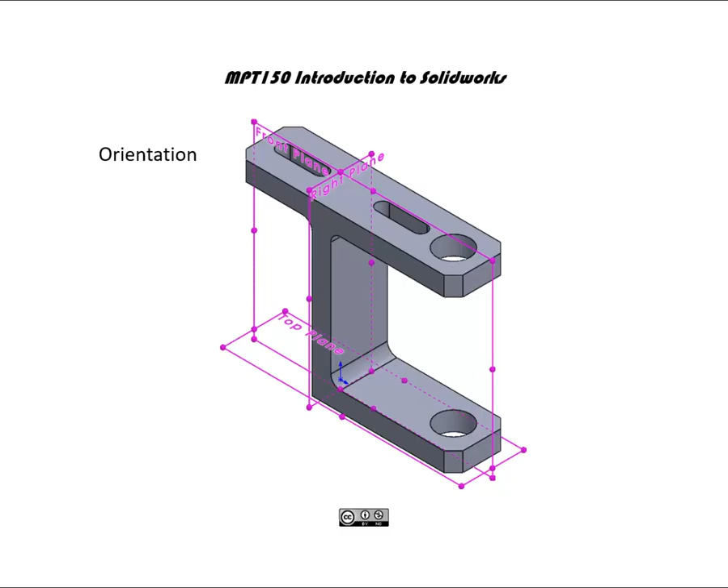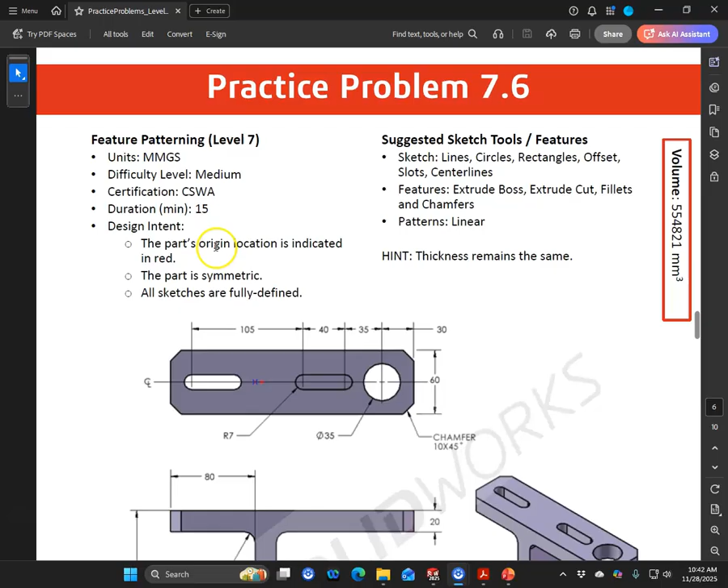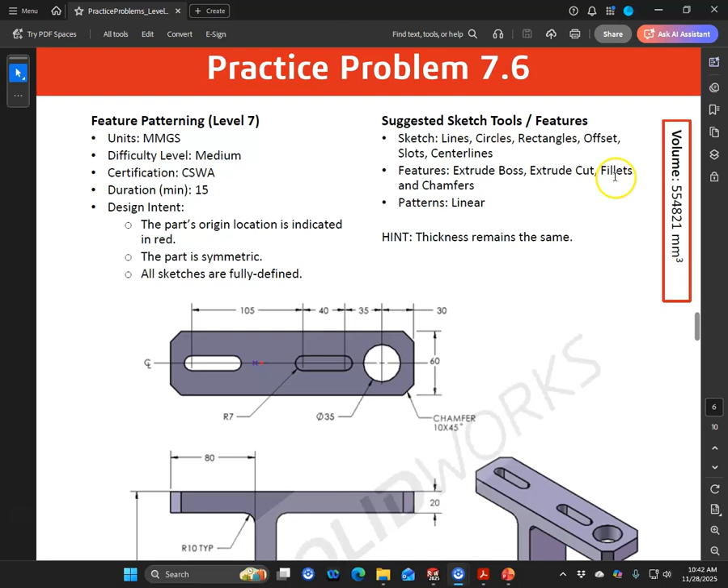Okay, practice problem 7.6, millimeters, grams, and seconds. Origin is located as indicated, bottom left, kind of center. We have lines, circles, rectangles, offsets, slots, center lines, extrude boss, extrude cut, fillets and chamfers, linear pattern.

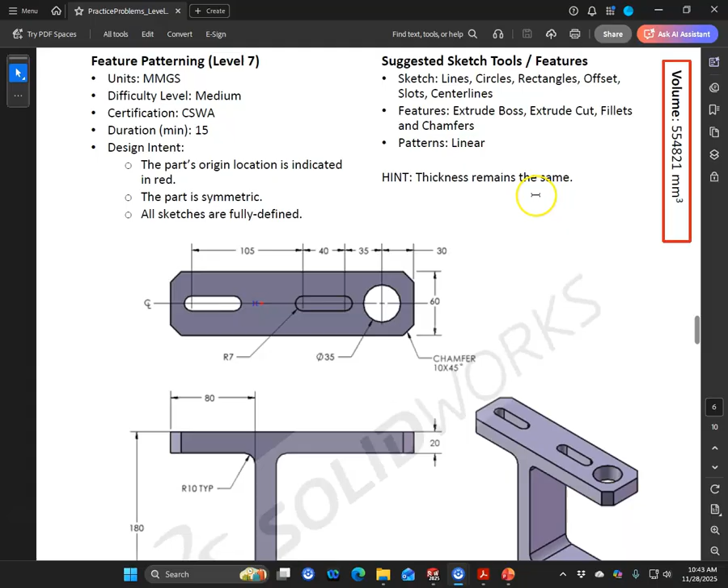Okay, I would probably just do a linear sketch or just draw two. The two doesn't really help or hurt. Thickness remains the same, so the 20 millimeters, radius is 10 on the interior, nothing on the exterior. So let's go ahead and open that up.

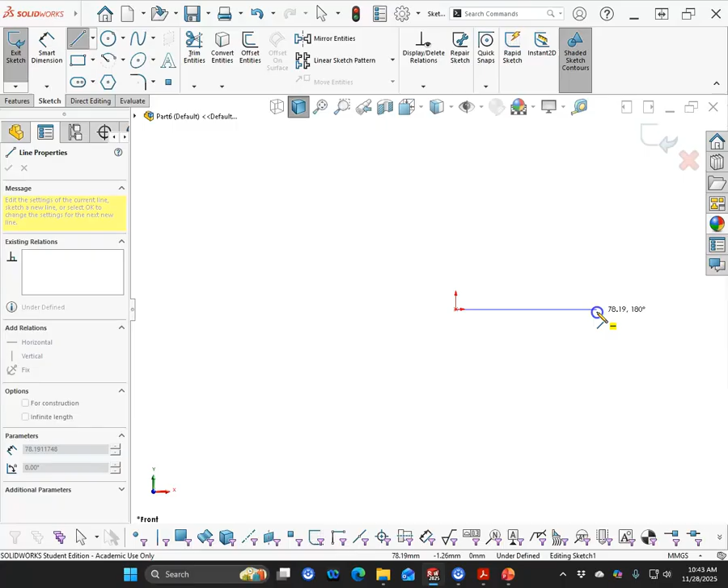And we'll go into, based on the isometric, we'll go into the front plane. Start drawing our geometry.

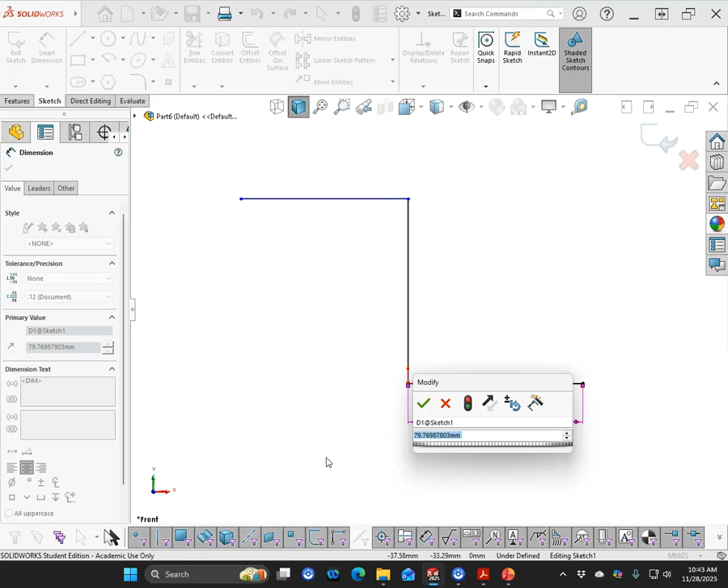One thing to keep in mind is that when we do the offset, kind of like the convert - and I think I've said this a couple times already, but if not, with the offset we're going to be able to drag that geometry. So let's just go select, control select, generate an offset of 20 millimeters.

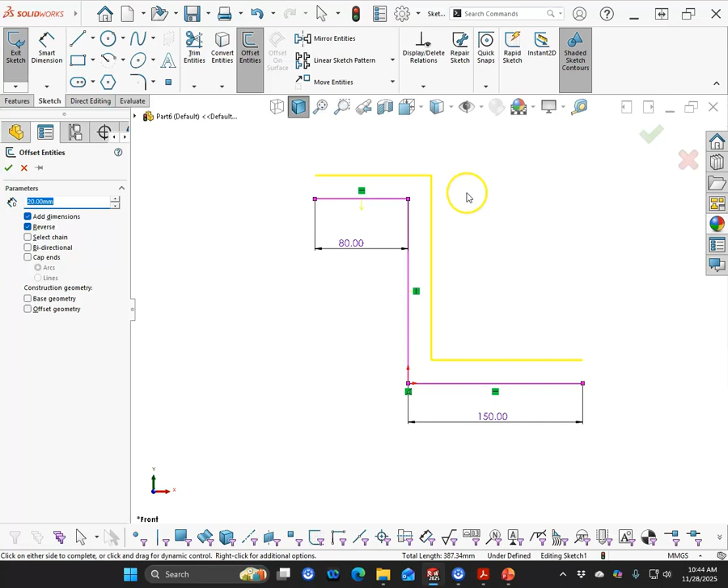I don't want it bidirectional, and I don't want to cap the ends. I do need to make sure it's going the right way. Well, that one did a little more than I wanted, so actually, in that case, I don't know that the offset's really helping me that much here.

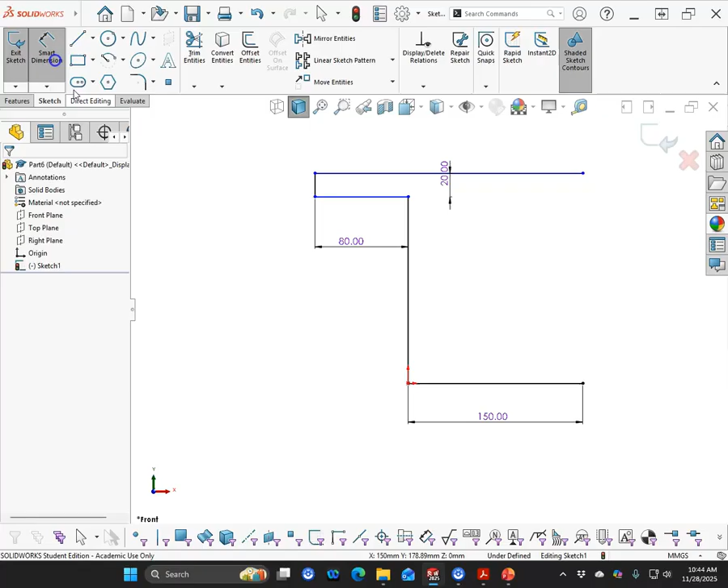Okay, so let's just bypass the offset. I was thinking that if I could get it to generate that geometry - well, let's do the example anyway. So I get that one. What I was working towards was with the offset, I can drag that in, and it is still an acceptable move to build that out. So 180.

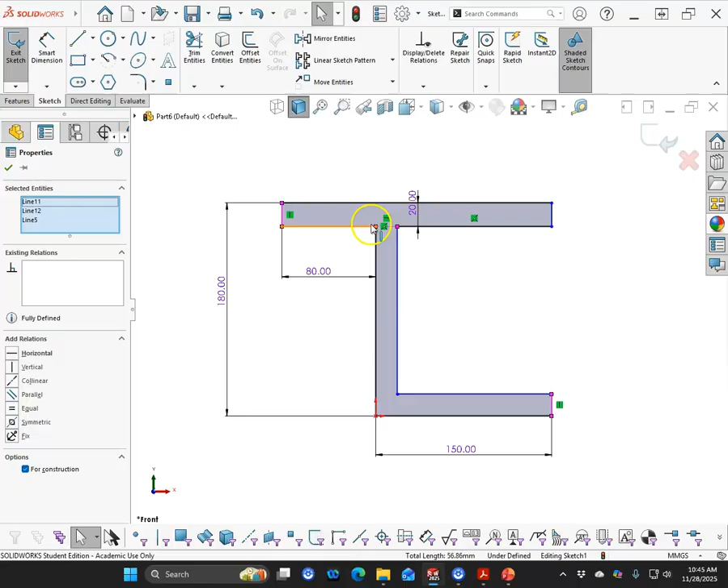All right, and then we'll just continue on back the other way. And so that line and that line - one of the things you can do for setting an equal, so I pretty much end up with one, is draw a center line between the two points, and when we set those, they'll all be equal. That will be collinear.

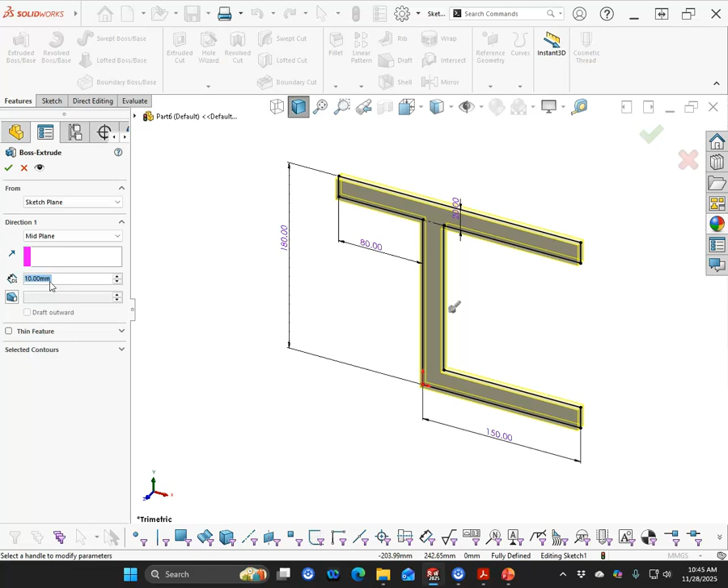And let's see, it is at the center, so we're going to go features, extrude, midplane, and our thickness is 60. We'll go ahead and accept that.

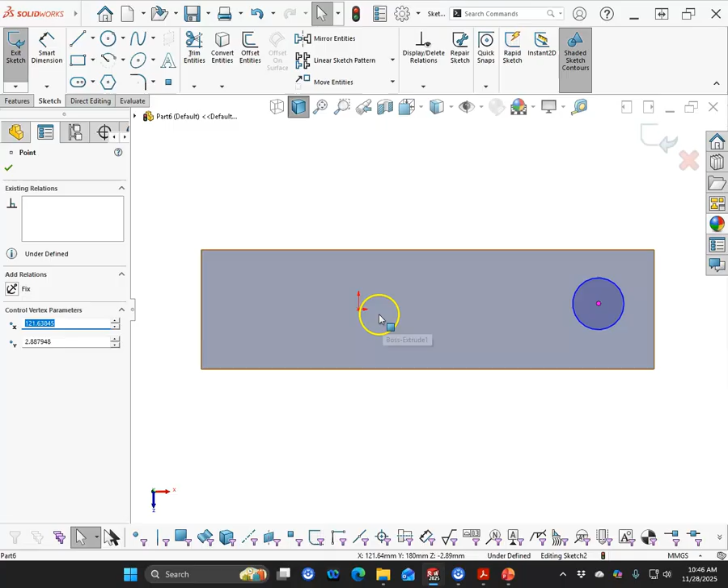All right, the through hole then - we'll just open up the sketch. Since it goes through everything, going to pick the center point and the origin, make it horizontal. And we have a diameter of 35, and its distance between - so we're 30 off of the end.

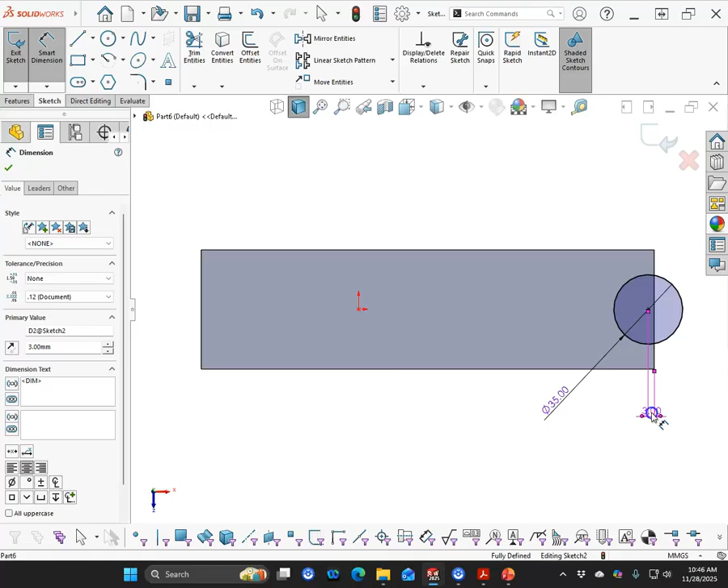Okay, so let's try 30 instead of 3. And that can be an extrude cut. And you just want to watch that if you do up to next, so our end conditions are really illustrated here. I want it to go all the way through, so through all finds the last available terminating feature.

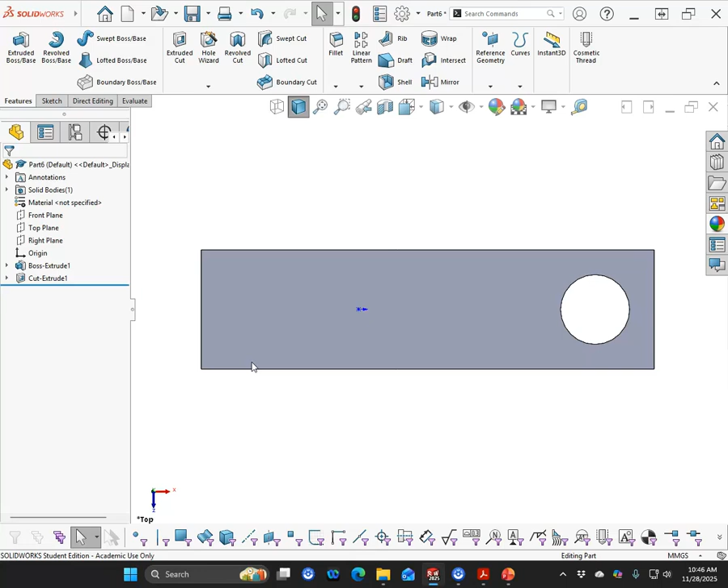Go back into the top plane, open up our sketch again. Because the slots are so easy to generate, I don't know that I'm really even going to take the time to create a pattern. So we do those two, set them to equal, 40 and 40. All right, so that was the symmetry.

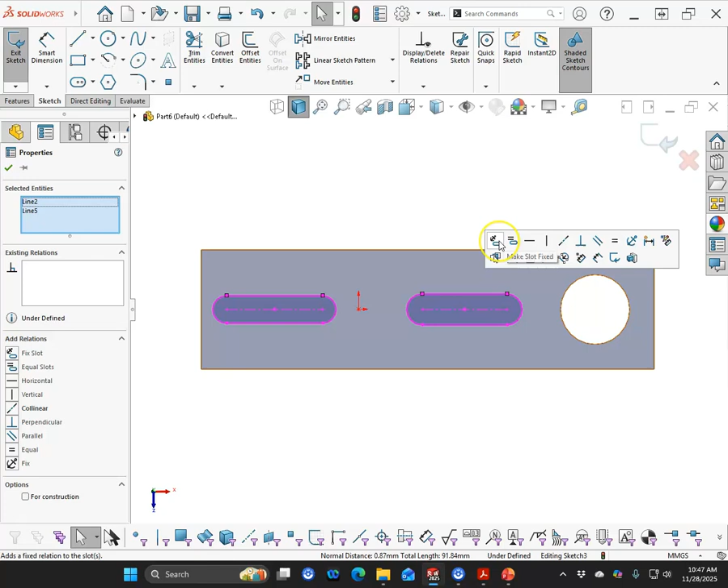We'll do the make equal. Anytime you see that little anchor or fixed, please stay away from fixed. There are places to use fixed, but not very often, and with the realization it's probably going to screw something up somewhere. All right, 35, and then between the endpoints, 105.

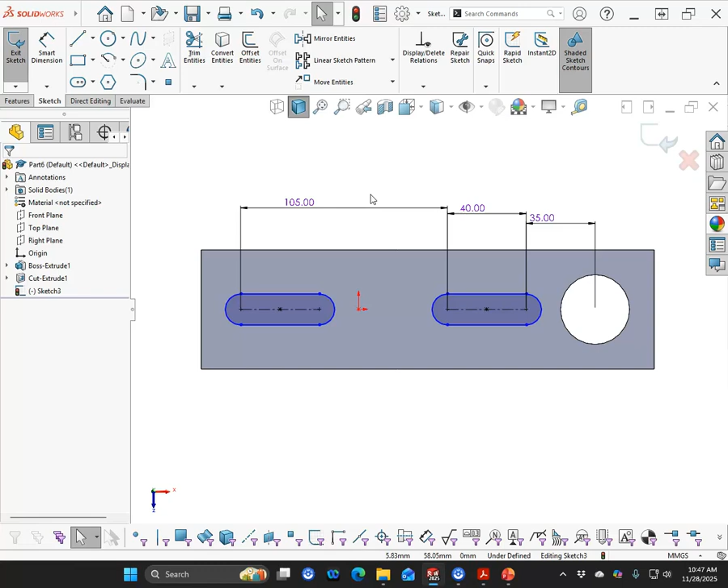All right, so thickness, radius of 7. All right, we'll extrude cut those up to next. Go ahead and hit OK.

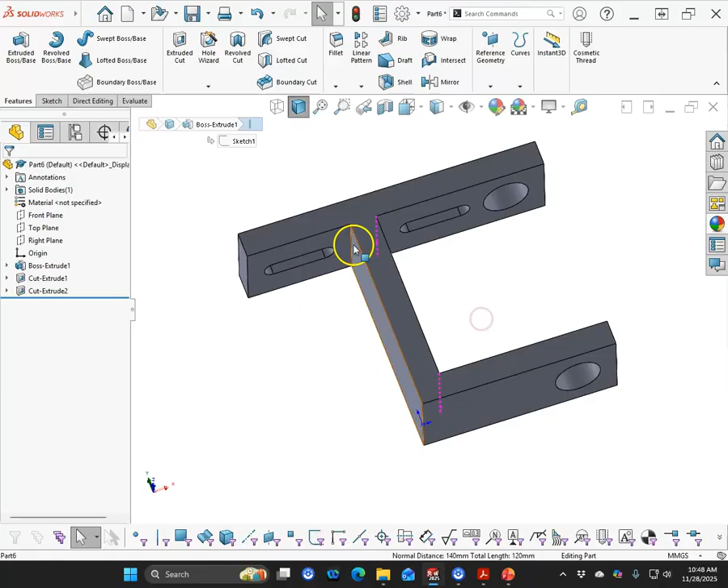And now we're left with radiuses and chamfers. So the radius says typical of 10, which if that's our default, we can go ahead and hit OK.

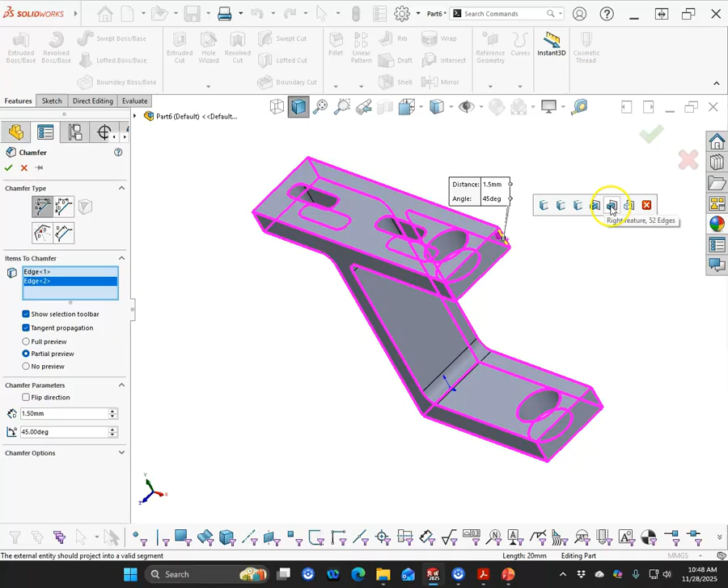The verticals then, chamfer, let's see, will it give us the same? No. Okay, that would be good. That would be good. No, that wouldn't be good. Not good, not good. So let's go with those, and then when I come back around to this side, it'll just be - no, not the whole face. I think I got a little selection happy, so let's get rid of the face.

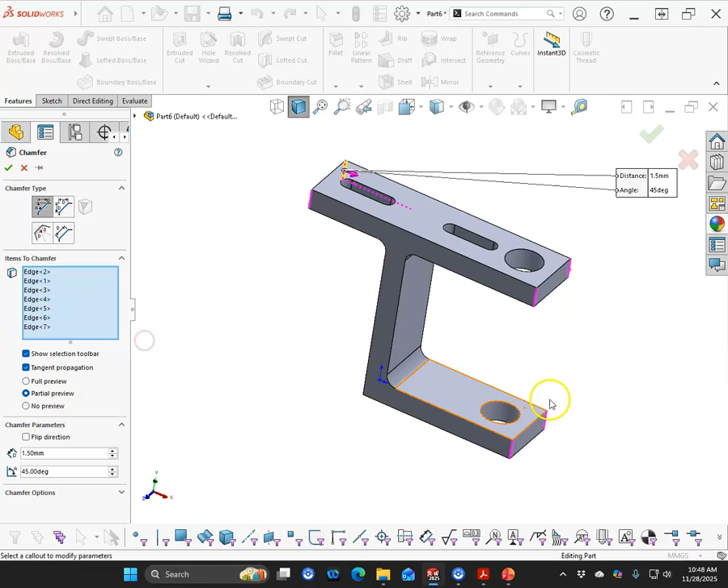So I should have 1, 2, 3, 4, 5, 6, and I have 7. So that little segment, there it is. All right, and the chamfer then, what are we given? A radius of 10, chamfer of 10.

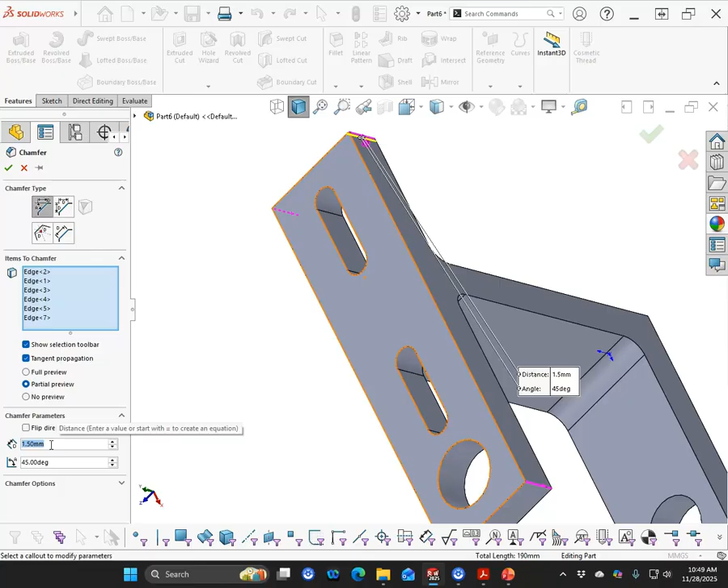Go ahead and accept that, and then we can save it. All right, P7-6.

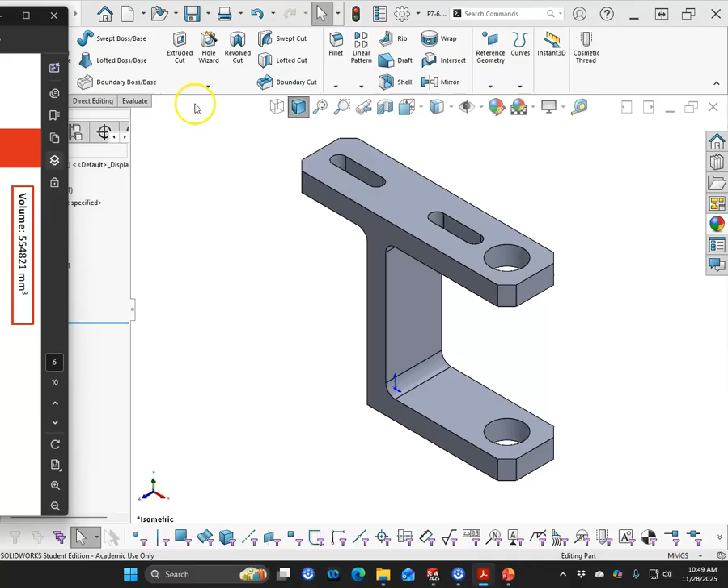And our volume then, we go back over to the evaluate, the mass properties, our volume then 54,821. If we round up, we got one.